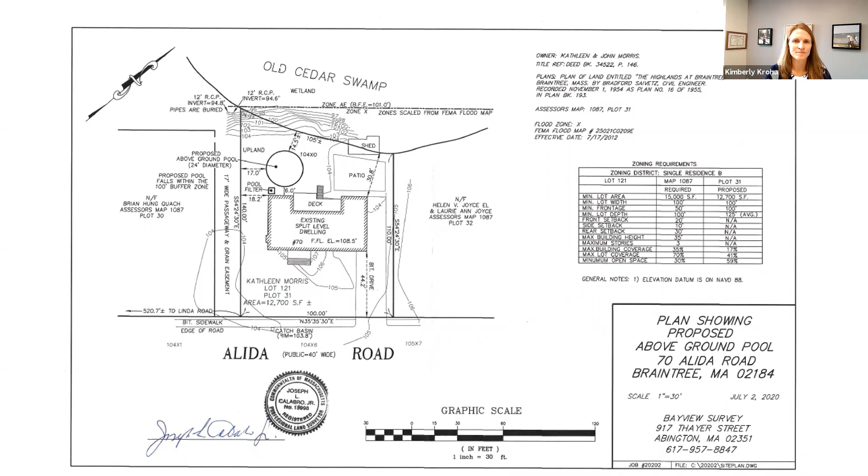I'm sorry, I missed who said that. Oh sorry, that was Kim Kroha. Oh, Kim, sorry, I can't see all the faces. I thought it was your voice, but it's harder than you think to navigate back and forth. No worries. So 9 months, you were suggesting? Right, okay.

That seems reasonable to me. It's reasonable to me. We don't need another plan, I think, if the zoning is a problem, and if you give them some time to plan for what the zoning issue is. Okay.

This is Peter Williams. I would say regarding the survey, we have a stamped plan and they could take some offsets from the corner of the house and locate the corner of the lot and then work from there on the fence. It probably would be close enough in this case. The plan does show—it's not to the lot corner, but there is the offset from the house to the shed. You can just take an offset, measure perpendicular from the house, then locate that point and work the property line from there.

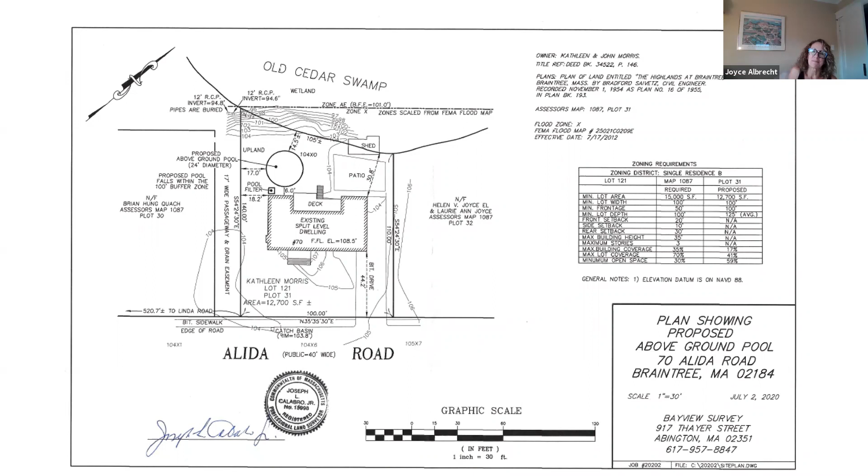Commissioner Hayward. Yes, I vote yes. Okay. Commissioner Kroha. Yay. Commissioner Albrecht. Yay. Commissioner Francis. Yes. And Commissioner Williams. Yay. Okay. That vote passes unanimously.

6-0-0. Okay. And why don't we now finish our discussion of, or make a motion with regard to the encroachment issue. So I guess now that I've said I would make the motions, I have to do this one as well. Let me just make sure I've got it all straight and we agree before I actually attempt to make this motion.

Based on the discussion, we're going to require that the shed be removed from the town of Braintree land. But we will allow the fence and the retaining wall to remain in place and the landscape bed, and require that a new section of fence be added across the property line from the edge of the shed to the property line.

We didn't talk specifics about mitigation. My thought was to require a handful of native shrubs and then seeding with like a wildlife seed mix, something along those lines. If anyone disagrees, speak up, or if I've missed anything, let me know.

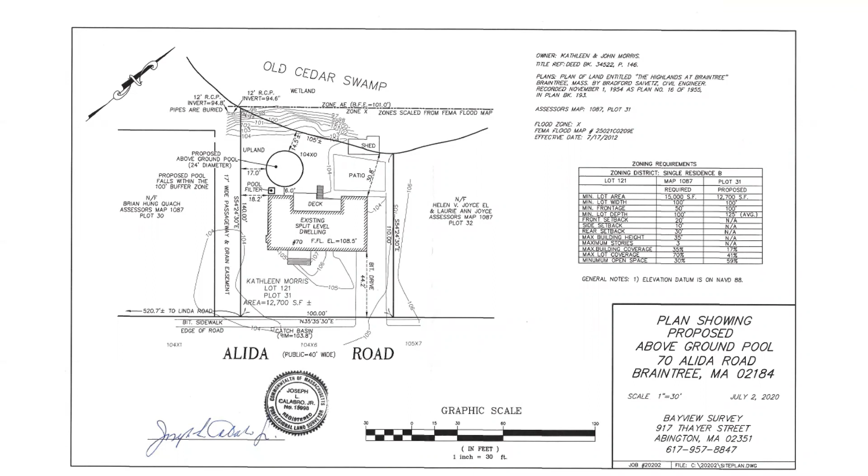Yeah, right. Only because - sorry - that shed is at least 20 feet. If you took a look in it, you would believe me, it's got things inside that need to be put somewhere. And not only that, to tear that down and remove it at a huge expense, I lose out on all that space, put up a fence, put up all the shrubs.

All I can say is it's very unfortunate when you're in this situation - you come into it not even realizing there's an issue. Unfortunately it happens sometimes, so you're not the only one, and sometimes this is how it comes up, where there's a permit otherwise - we don't always know about these things. But when we find them, we have an obligation to take some sort of action. And there's also a bit of precedent where I'm sure there's other encroachments in town, and we have to be consistent with how we respond to things. So yes, that was the decision, but stay in communication with Kelly - we do want to try to work with you to resolve the issue. And with that, I guess I will make a motion, unless there's anything further to add from anyone.

Okay, I'll make a motion to close the hearing for 70 Alida Road. Is there a second? Second. Thank you, Commissioner Francis. I'll now take a roll call vote. Commissioner Hayward, yay. Commissioner Kroha, yay. Commissioner Albrecht, yay. Commissioner Williams, yay. Okay, that is unanimous again, 6-0-0.

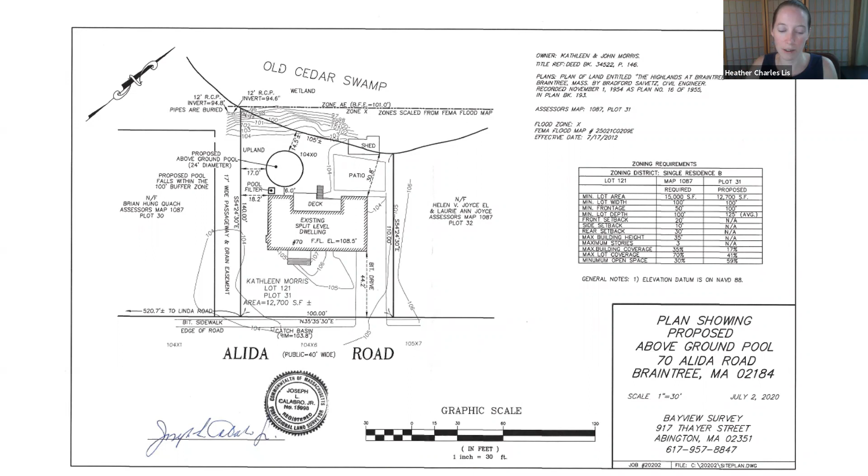Thank you to the Morrises and all for your cooperation. Okay. Thank you. Okay, good evening.

Now we have a notice of intent, DEP file number 8-681. The location is Gordon Road, Watson Park, and the applicant is the town of Braintree. We have two notices of intent for the same locus. The first one is for the bank and salt marsh work. And I will turn it over to the representative to present to us.

Thank you. For the record, my name is Elise Leduc. I'm a coastal scientist with Woods Hole Group, and I'll be representing the town of Braintree for this and the following application.

This, I guess, would be up to the commission. Kelly and I had talked about it beforehand, whether it would make sense to open both hearings and talk about them as a sort of single conversation, but it's up to the commission whether you think that is more or less confusing. Okay, commissioners, any strong opinions on that? I would recommend doing them together just for the big picture and the background are the same for both. Yeah, yep, I'm fine with that.

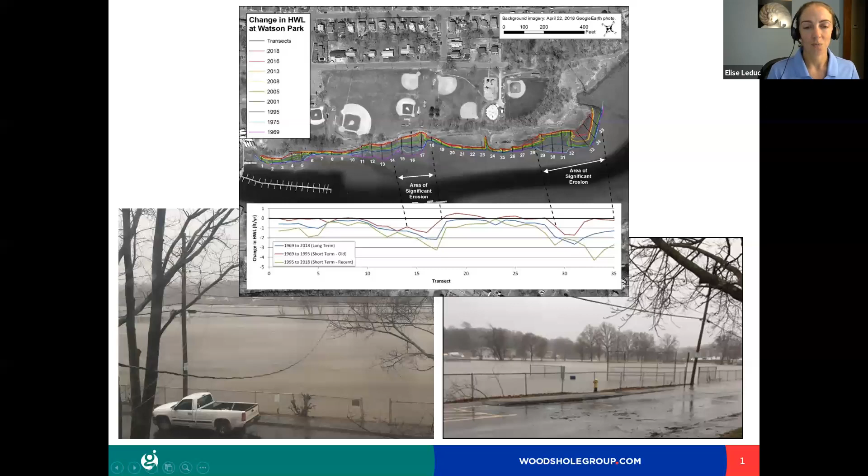In addition to erosion and flooding, looking forward, the question was also what is the future of this park, and what is sea level rise going to do to the water levels in this river? Currently, the present day mean high water is at 4.8 feet NAVD 88. That's expected under a high sea level rise scenario to rise to 5.8 feet by 2030 and 8.36 feet by 2070. The important part of this number is that most of the playing field surface within the park is at about 8 feet today. That means the prospect of the salt marsh migrating landward is not likely until sea levels reach this level.

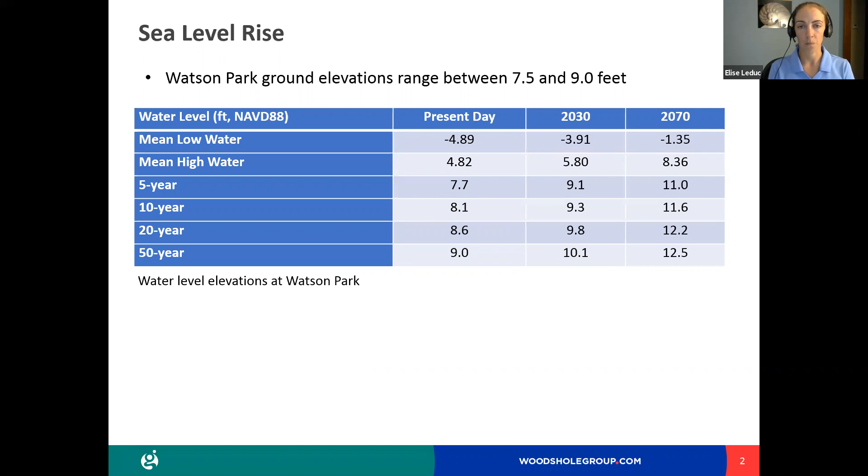So thinking on the order of approximately the 2070 timeframe, while it's in the long range plan to allow that to happen, what can we do to protect the park from flooding in the short term? That's part of where our proposal came from — stopping short-term flooding with the idea of helping long-term salt marsh migration. I'm hoping many of you have seen the site, it's a really unique area. I'm not sure how many of you have actually walked out into the intertidal area and seen it from the water rather than from up behind the fence. But I want to walk through what some of the resource areas actually look like.

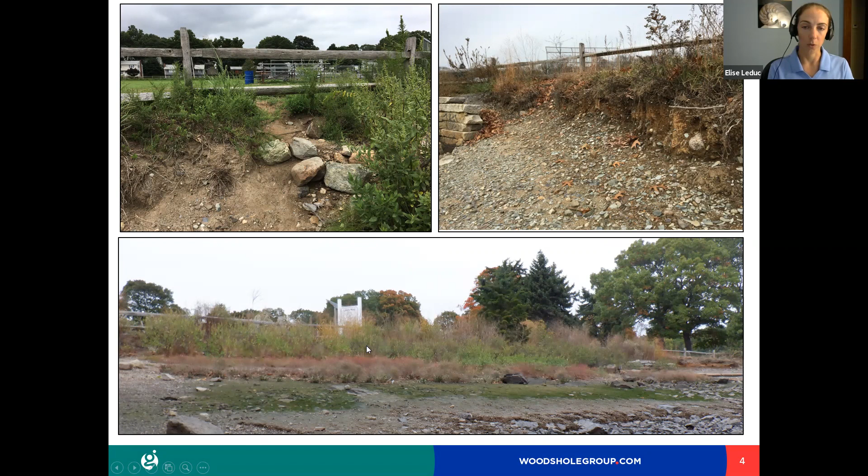The coastal bank was one of the main concerns from the town when they first approached Woods Hole Group. There are a couple of sections of significant bank erosion. The bank is not very tall, but where it is eroding, it's causing potential problems for undermining of existing structures and/or threatening the walking path and playing field area. So there are a few sections right around the head wall of the existing stormwater outfall that are significantly eroding. This photo on the upper left is actually right at the terminus of that stone seawall, where the bank is cut back behind the location of that wall. The center of the bank, however, is fairly well vegetated and fairly stable — some shrubs, there's even an eastern red cedar growing in the center of it. So there are some portions that are fine, but there are portions on either end that are eroding, and we are proposing to restore and stabilize.

This is just a view of the bank from up on the path, which you've probably seen. You can see how close in some cases the erosion is getting to where the walking path is, and how the bank is actually cut back behind the level of the seawall where it is right now.

There's also significant salt marsh remaining in this location, more so to the downstream eastern end. There's a very large platform of healthy salt marsh, Spartina alterniflora, along the river side, and a large platform of mostly Spartina patens across the center. But that portion is significantly scarped and eroded — there's about a 4 or 5 foot drop from the front of this salt marsh area down to the mud flats. As you move across the project site, there's only remnant scattered pieces of salt marsh. This center area is mostly sea lavender that's remaining, and there are some areas of high tide bush with some Distichlis and Juncus mixed in along the edges of the wall. But basically as this area erodes, salt marsh is getting pinched — it's left with very few areas where the elevation is appropriate for salt marsh vegetation growth and survival. The rest has been eroded too low to allow for salt marsh grasses to persist.

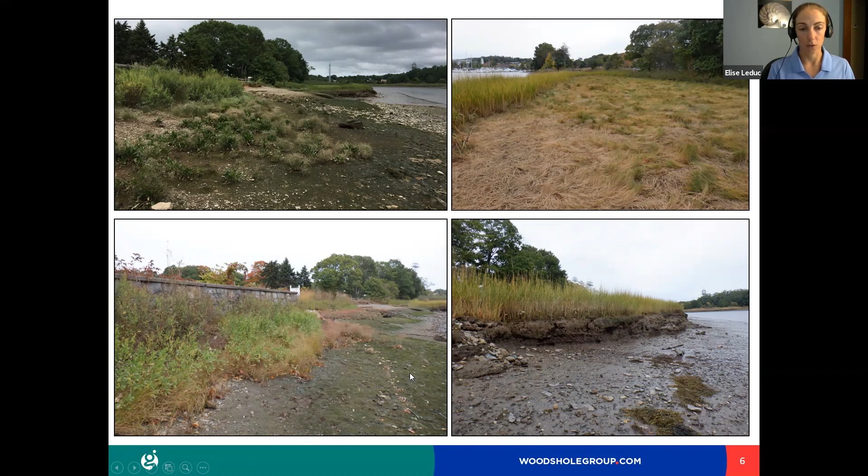There are also 4 lobes that we mapped as rocky intertidal. These rocks are coming out of the beach essentially as the finer grain materials are eroded away over time.

Some areas of it are largely bare rock, while other areas provide habitat for barnacles, attached macroalgae, and other organisms. There's even a section up by the stormwater outfall where, in addition to the outfall walls and stone blocks, there's natural stone material actually meeting the definition of boulders in an intertidal area, making it rocky intertidal shore.

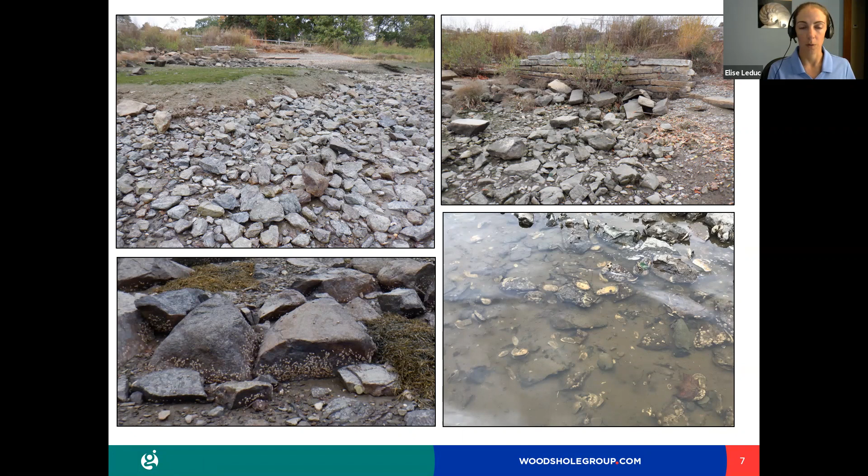And one of the lower elevation areas actually had live attached oysters. So there is significant habitat out there, and our project footprint avoids these areas almost entirely. In some cases, we're actually trying to mimic some of these habitats in our project.

I'd be remiss if I didn't point out that even though we focused on the coastal bank and salt marsh restoration, we're faced with a site that has this in the center of it, so we can't put salt marsh back across the entire project area. There are two outfall pipes, though it's hard to see the second one. They're both crushed, and the wall itself is in a state of disrepair. You can see some of the large stones have been pushed out and off of the wall. These two pipes drain the entire neighborhood behind Gordon Road during storms, so all the stormwater comes out these two pipes.

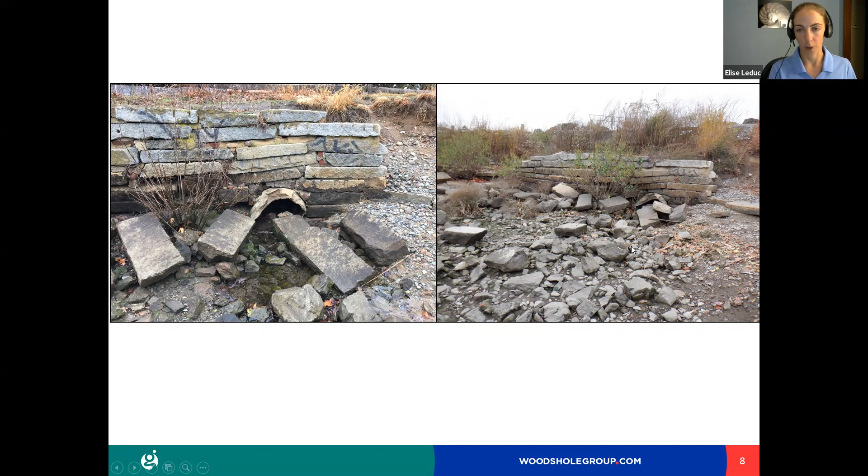Just one more view of the site. In addition to the resource areas I talked about, the entire park is within an AE flood zone, so it's land subject to coastal storm flowage, and 200 feet from the high water line also falls within the riverfront area. And I did mention the land containing shellfish.

We do have oysters as well as some low density areas of soft shell clams. So that's the site as it exists. What we're proposing is actually four different components, broken up into two different applications. The first component is a restoration of the salt marsh areas.

We're proposing to place 260 cubic yards of engineered wetland soil—this is a cross section down the site—to bring the elevation up to a point that will support salt marsh vegetation. Right now it's very low due to erosion, but to stabilize the amount of fill needed, we're proposing a rock sill to stabilize the toe. This will require dredging 86 cubic yards of the coastal beach to create a stable toe for that rock sill.

We are proposing two different sections, one on the east and one on the west of the existing stormwater outfall. To minimize the size of this rock sill, both in length and height, we're proposing two different target heights for this portion of the project. The western portion will be built to 4 feet elevation, but on the eastern end, in front of the existing salt marsh platform, because the height needed to reach 4 feet is so significant, we're proposing only 2.5 feet, which minimizes the face of that rock sill on the river side.

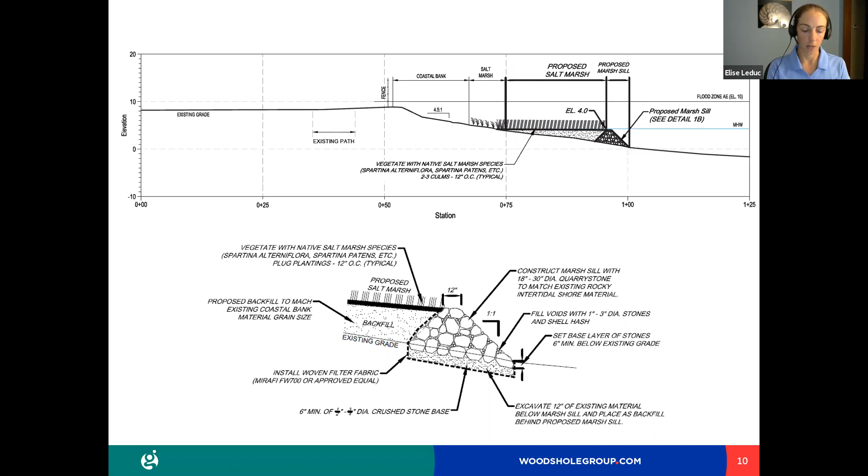The headwall itself will remain. We're not proposing to fix anything about the upstream end of the stormwater system, but the part that's actually exposed within the project site we plan to repair in place, with the difference that we're trying to minimize the front face of the wall by stepping it down instead of having a solid rectangle. This will minimize wave reflectance during storms moving forward.

We're also hoping to replace the very ends of the pipes, where they're currently crushed, and retrofit them with a check valve or tide gate. Currently, if the tide reaches a really high level during a storm, water could push back through the stormwater system and percolate up through the storm grates in Gordon Road. By adding a tide gate or check valve, you allow only one-way flow—water can come out of the pipe, but tidal water can't go back up into the system.

In the rocky intertidal zone immediately downstream of the current outfall pipes, we're proposing to add additional stones of a similar size and nature to what's there now, to help slow the flow that comes out of that pipe and reduce scour in the future. It's that ongoing scour from both the pipe and boat wakes and storms that's actually removing the fine-grained material from this site, so we're trying to slow down that process as much as we can.

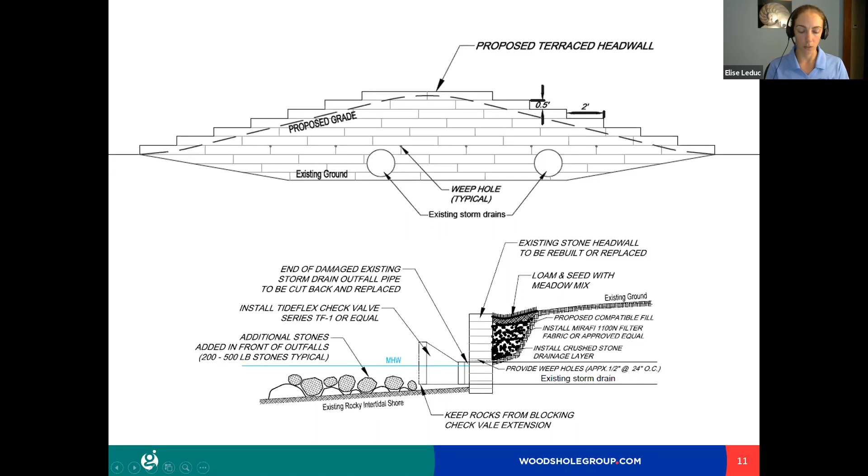We're also proposing to stabilize 2 pieces of the coastal bank. Just to orient you, the end of the seawall is down in this location, the existing stormwater head wall is here in the center, and the fence and walking path run right here. There are 2 sections: one 30-foot section nearest to the existing seawall, and an approximately 60-foot section of coastal bank experiencing erosion right now, around the stormwater head wall.

We're proposing to cut that back. If this is the existing ground, we're proposing to cut it back to a stable 3-to-1 slope, install a biodegradable erosion control blanket over it, and plant the surface with a native New England coastal salt-tolerant grass mix.

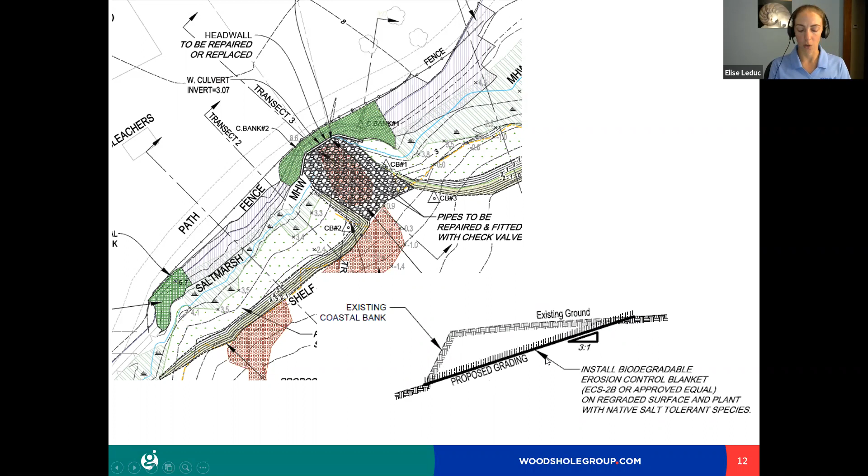The second application has these second two components, but let's walk through them now. As I mentioned in talking with the town about the problems on this site, in addition to the erosion and the loss of salt marsh and the potential longevity of the salt marsh here over the long term, we realized there's also a flooding problem. While the baseball field may not be able to persist past 2070 due to new sea levels, in the meantime it's going to flood at an even higher frequency than it already does today.

To eliminate what would be continued maintenance costs, getting debris off the field and reseeding where grass dies from saltwater, we have proposed putting in an earthen berm along the existing location of the footpath. The footpath would actually run up along the top of the berm, which would be built to an elevation of 10 feet, about 2 feet higher than the ground level there now, with 3-to-1 side slopes on both sides.

The field side of the berm would be planted with a regular lawn grass mix that could be mowed, similar to the field side, and people could walk up the berm onto the path if they wanted to. The river side would be planted with a native mix of grasses and plugs of other native species. The path itself would remain pervious, using either crushed shell or pea stone, so there would be no impervious surfaces added as part of this project.

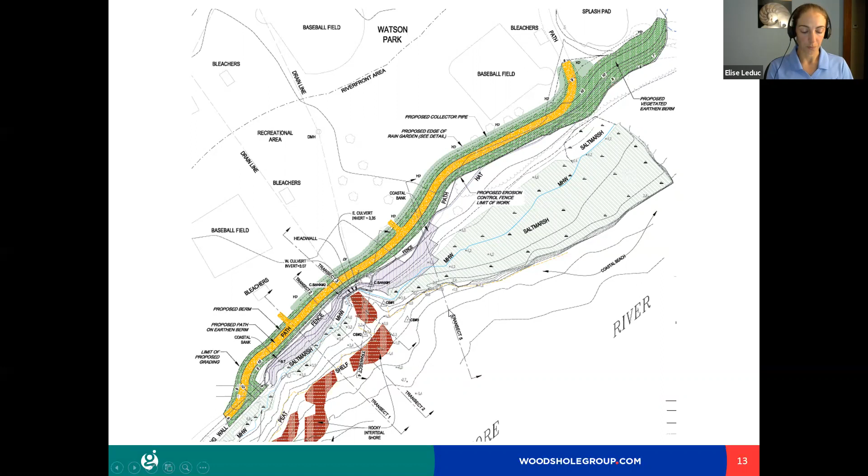These rain gardens would be right off the edge of the slope on the field side of the berm. They would be planted with a mix of native plants, and there would be an overflow pipe within them. Minor, regular storms would percolate directly through the soil, while any larger storm, rather than overflowing the rain basin, would go into this pipe, run along a collector drain, and ultimately connect into the existing stormwater outfall pipe.

I think that is what we were proposing in a nutshell. There are some questions that Kelly raised in her report, which you folks probably received a copy of as well. One thing I'd like to point out, and we can talk about this in more detail, is that we were unaware when we designed the project that there is an existing rain garden on the river side of the splash pad.

We were thinking of ways we could redesign the project based on input from the commission, whether it would make more sense to turn it early and connect into the higher elevations on the side of the splash pad, avoiding the rain garden entirely, or to make it slightly more narrow, running in front of the rain garden and connecting into the higher elevations on the eastern side of the splash pad.

There are pluses and minuses to both methods. Running it to the west of the splash pad actually leaves a small flood pathway on this side of the splash pad, potentially undermining what we're proposing to do with the berm in the first place.

However, running this in front of the rain garden would require cutting back some of the existing woody vegetation. It would also need to be slightly more narrow in order to fit with the least amount of impact to that vegetation. And we'd have to figure out how to deal with the overflow pipe from the existing rain garden.

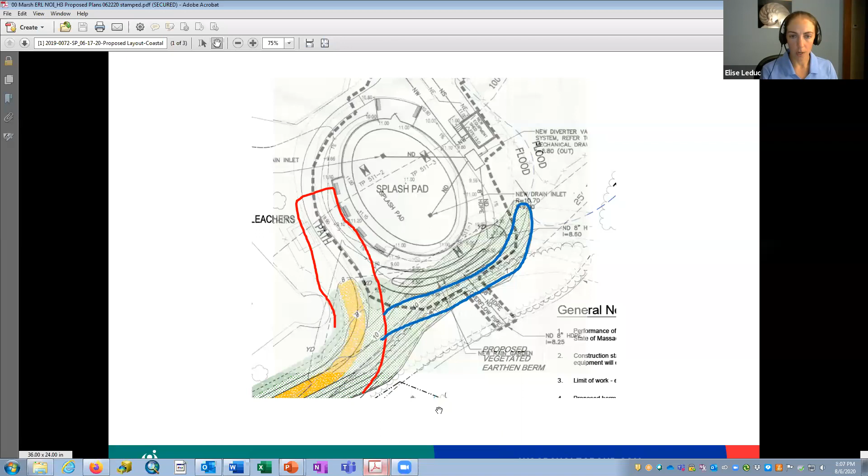Yeah, so I can show you and also give you the numbers. Hopefully you can still see my screen, so I reshared it. Of that 6,498 square feet of coastal beach that's being converted...

4,398 of it will be restored as salt marsh, and that is the total of the area in both restoration lobes.

The additional 1,366 square feet is actually from the front half of the sill. It's a little tricky to see, so I'm going to zoom in more to describe this. At the crest of the sill, these lines going forwards and backwards are the sill slopes itself.

The salt marsh restoration will actually come to the middle of the sill, so this portion back here will be buried with fill and planted with grass. But this front portion is the front facing slope, and it does take up space. So that additional 1,366 square feet is from the sill footprint.

Okay, thank you, that's really helpful. Yep, it's a lot of detail on this plan, so good to be able to zoom in and share the screen.

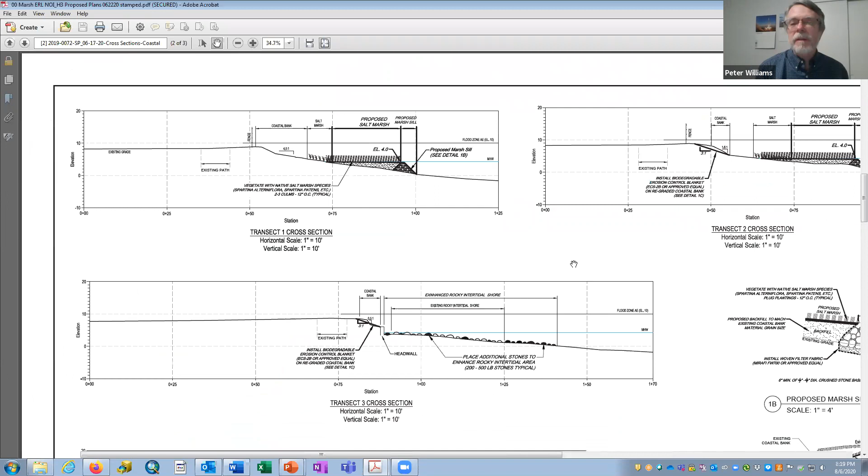Maybe round that off a little bit, let that opening open up a bit and reduce flows during storms, if you can consider that. And then the other thing was on the sill itself, you're filling the voids of the sill, but wouldn't that make the front slope more of a solid surface, which would actually cause more wave reflection? And you may not want to do that. Is that essential to the stability of the sill if you leave it as porous?

Are you talking about this figure here? Yeah, where you call for fill, you're filling all the stones. So basically you're going to have a flat face here. Yeah, it is essential that this sill not be porous. Otherwise, what we are putting in to create the fill for the salt marsh would trickle out over time, and you would have a sunken area in the back end.

Our goal for this, although it looks very flat here, is to use stones very similar to what's at the site. So it will be somewhat flattened, but it won't be smooth, it'll be more natural rock. Okay, so you can make the front face irregular, but have the core stones to keep the fill in. Correct. Can you make that adjustment?

Do you understand what I'm getting at? Just make a note that the front face will be an irregular surface, not smooth and flat. Yes. That's it, thank you very much. No problem.

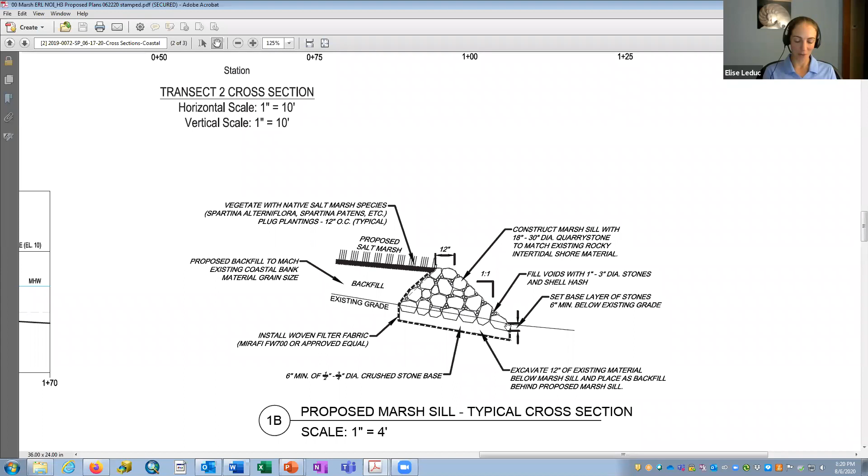Sorry about that, not the only one with a little interruption on the side. Apologies. Does yours have four legs too? Only no, two, but of small stature.

Okay, thank you, Peter, for all those great questions. And I have a few, but did anyone else want to comment first? Feel free.

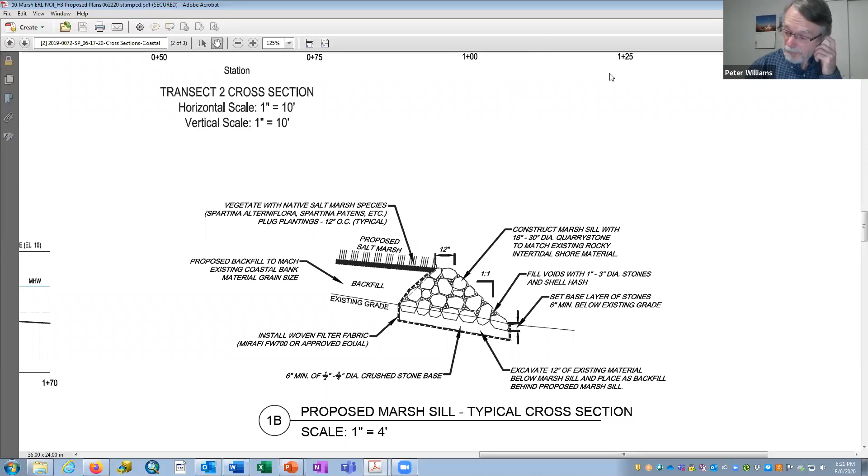I guess I have a question, I'm Chris Hayward from the Conservation Commission. Am I muted? I can hear you fine. Excellent, all right great. So I'm down at that field an awful lot during the summer months, and we're always telling the little ball players to please stay on this side of the retaining wall, please don't go over under the bank. Will there be any type of signage to let people know what this project's going to be all about, and kind of stay out of this area? They're always chasing foul balls, so things are going to just get crushed after they get planted. So just for a little bit of educational material.

Kelly, do you want to respond to that? Well, there is a plan to have some educational components, which we haven't nailed down yet. There's also going to be temporary wildlife exclusion fencing around the salt marsh restoration until it gets established. But other than that, we weren't going to fence it off, other than perhaps putting the split rail fence back up just to discourage people from walking down there.

But you think that split rail isn't enough? Like kids would actually go walk on the salt marsh? We had half of our team the other night, we won a game and they took all their shoes off and went dancing in the mud.

So, guys, come on, get out of there. This is ridiculous, will you please leave? Yeah, I mean, it's tough to control, of course.

I was just curious. Some of the coaches aren't into this type of situation like I am, and I'm always preaching, guys, stay out of there. But some folks might not exactly know why this is being done, so I think education is the answer.

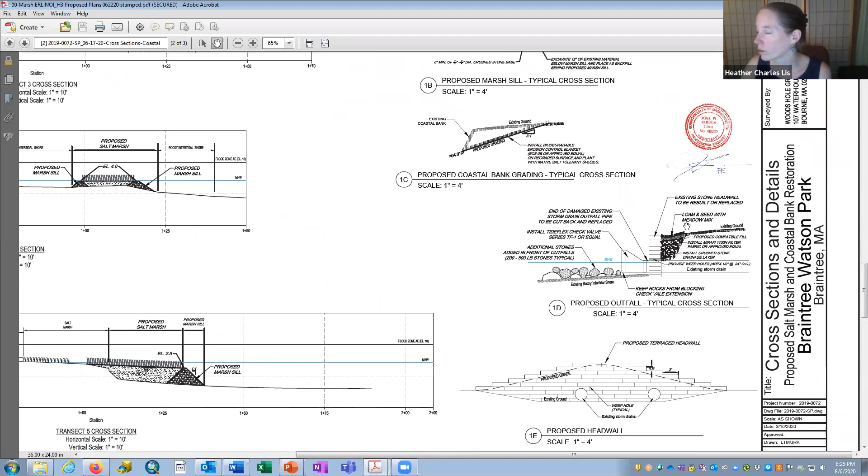Okay, I had a few questions while we're on the nitty gritty. On the detailed plan behind the outfall, there's a meadow sort of shown. Are you on this main plan or on one of the details? I am on the first detail sheet, this area here, the outfall. So it's 1D, the proposed outfall typical cross section.

Yes, so there's loam and seed with the meadow mix, and I didn't see, although I may have missed it, a specification given for the meadow mix. It probably is not in there. This is a really small area, so I think we were just trying to indicate that we were trying to fill - there's a gap behind the head wall right now. You can stand in a knee-deep hole behind the existing head wall, and we just wanted to bring that back up to grade and plant it with something native that wasn't lawn grass.

But we can add - I would actually probably want to just change this to the same mix that we're planting the bank with, which is what did we call it? A native salt tolerant grass mix. That sounds good to me.

I actually wondered, in part that's why it jumped out at me, because I was wondering what the difference is between this meadow mix and this other area. I don't think there is - I think there's sometimes a miscommunication between the ecologists and the engineers. Well, you have such beautiful detailed planting plans for the other areas, so I was just being thorough, trying to catch every little bit of plants.

Yeah, no, thank you for going through these with such detailed eyes, because ultimately you give this to a contractor and they're not going to know what it means either, so better to get it right now. Sounds good. So I also had a question about where the marsh is being restored.

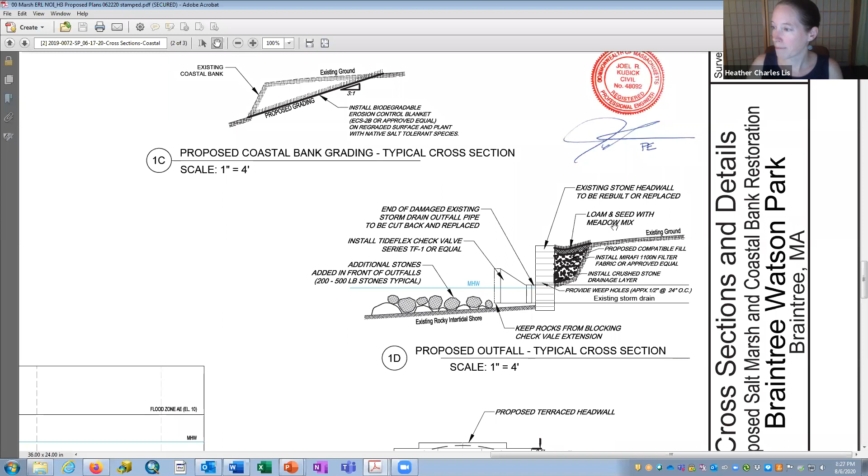As Peter was also pointing out, where there's a proposed restoration, a lot of it follows along where the base of peat currently is. I realize the limit of work is the retaining wall, but I see there's a large base of peat where there was historic marsh, along the retaining wall to the west of the proposed work area, southwest. Was that area excluded simply because of cost and the limit of the project, or is there another reason why it wasn't suitable for restoration?

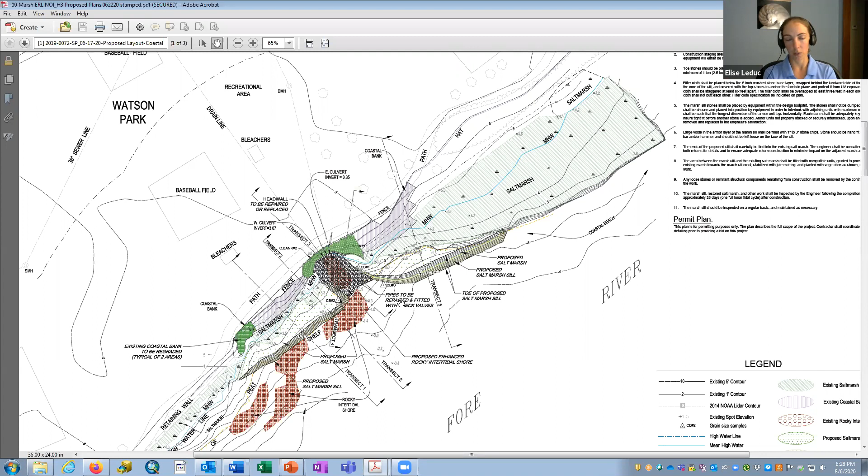Correct, it's just a matter of scale. The more of this coastline you try to restore, the engineering fees will be more, the construction fees will be more, and the monitoring and maintenance fees will be more for the town. While it would be great to restore salt marsh in front of the entire area, the real impetus for this project was this one open area beside the wall before you get into that shrubby vegetated area farther down the path where the erosion is evident, to slow that erosion, protect that coastal bank, and restore some habitat at the same time.

Okay, thank you, that's helpful. I always like to look at what's the most we could possibly do with a restoration—with more money you can do the whole thing. A little pie in the sky, but I wanted to ask and know what the limitation was. Yeah, we just had to draw the line somewhere, so we went about an equal distance on both sides of the main core problem area. Okay, great, that makes sense.

The last thing I had is that there was a comment, and I didn't unfortunately write this in my notes, whether it was from the ENF certificate—I think that's where it was from—or whether it was from the Marine Fisheries comment letter. But in any case, the suggestion came up to put some mats over the existing marsh during construction, and also to not store any equipment, machinery, or materials on the marsh, which seems very straightforward. Do you have any thoughts on that? I don't actually, I missed that one, so that's not in my notes.

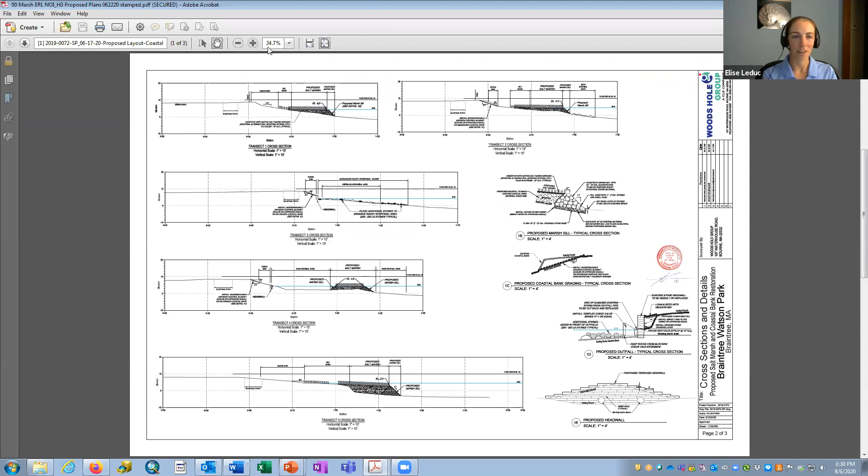Do you have the actual language? What kind of mats were they proposing? I don't think it's specified, but I might be able to search the document. Fingers crossed the word mats only comes up once. Marine Fisheries does talk about using best management practices such as mats and blankets to minimize turbidity impacts, so that's a little different.

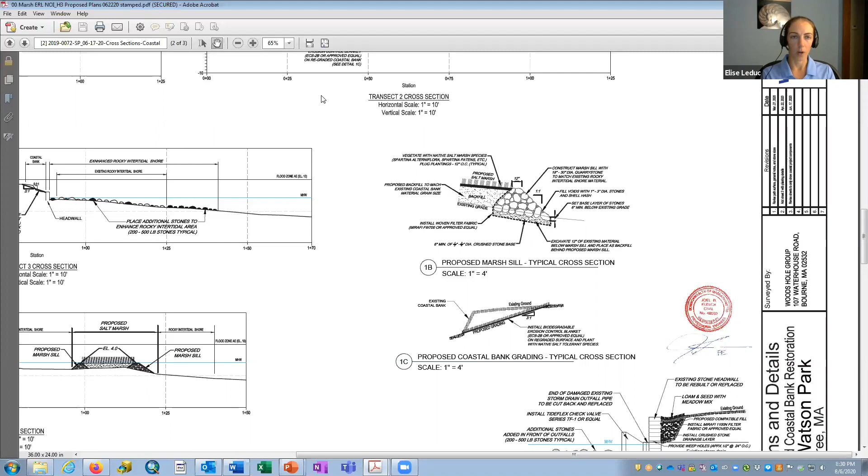Okay, here it is—page 130 of the PDF, and I was right the first time, it is in the ENF certificate. It says DMF recommends that existing salt marsh be covered by mats when accessed during construction. So it's probably just a general comment they're making, more relevant if the only place this might need to happen is on the eastern end of the project where the existing platform is.

So if we have to come out here to construct this, we'll put mats down over this part of the marsh. The goal is to construct as much of it as possible with a long reach excavator from the actual field, so you're not running equipment down the bank and onto the intertidal area to the extent possible. But this area is so far from where you can park something that we may have to come out just a little onto this platform. Okay, that makes sense—so as with many other things, I'd suggest adding that into the narrative somewhere.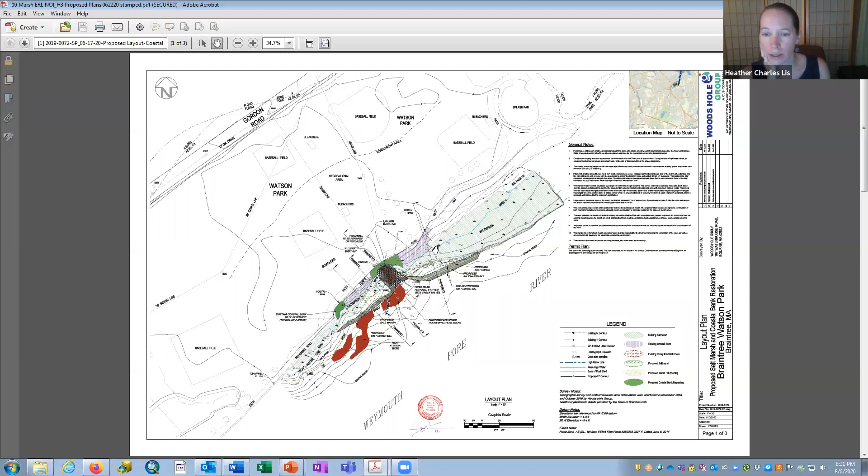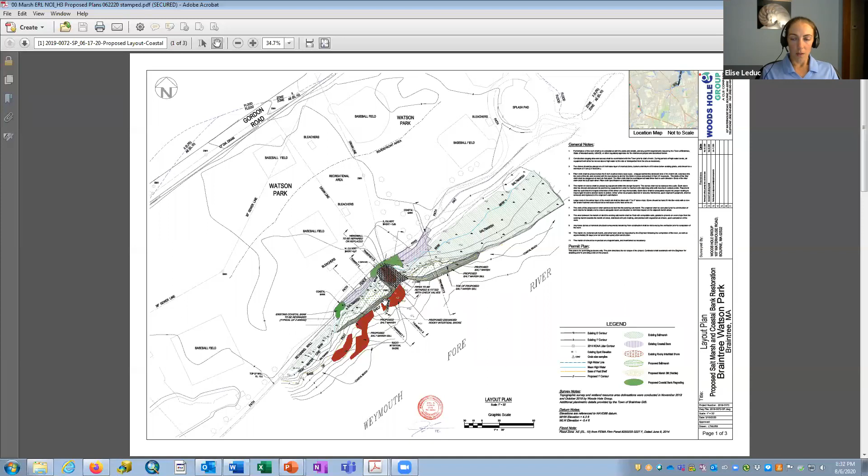The last question I had—sorry if this was in the narrative and I missed it, it's a long narrative, but I appreciated it, very interesting as well—the existing salt marsh, as you get closer to this outfall, is very sparse in places. Are there supplemental plantings going in for the existing marsh, I mean? I don't know that we really thought about that.

I know we were talking about planting the area where we're putting fill in, but it certainly makes sense to carry those plantings back to the coastal bank where there are bare spaces in between, say the sea lavender individual plants and things like that.

Again, it's more cost to the town, but I think you'd end up with a better product because you're buying more plants at that point. But to the extent that there are large gaps, that would certainly be useful to do.

I'd also say if this is constructed in, say, March or April, those plants aren't even visible. The above ground portion dies back and gets sheared off with the ice and water. So when you visit this site in winter, it looks like there is no salt marsh in this area. If you go back in summer, you can see the vegetation that's popped back up. But during construction, it's likely that will all just look like an area to get planted.

So I would say, yes, there would be plantings in that area, but we can make that clearer in the narrative. I think that would be great. I see it as something that is for the benefit. The cost is not that high compared to the rest of the project. Exactly, a couple hundred more plants isn't going to make or break the budget.

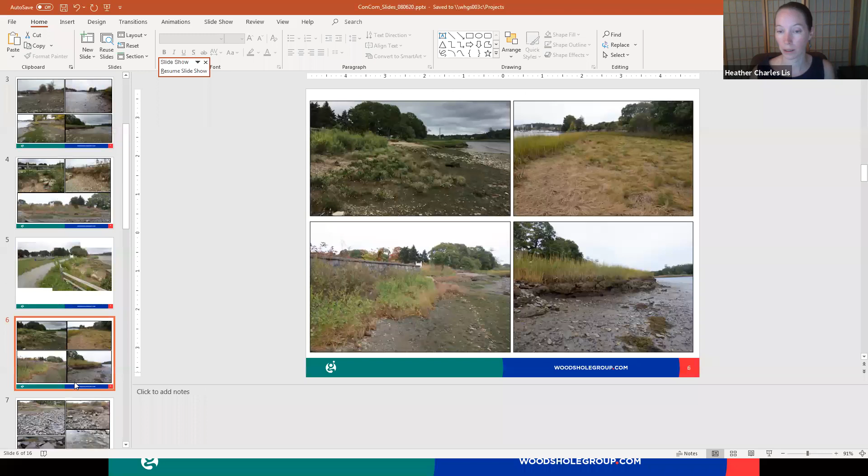Okay, then we'll move on to item 6. This was already discussed a little bit about the berm appearing to extend into the rain gardens. I think this would be an opportune time for the commission to talk about that area, basically. Assuming that the commission agrees to approve the work, we can talk about that as well. If anyone has a strong opinion on these options here, you could say it now.

So I do have one comment on this. I'll just say, with the blue option, I'm not sure how we could permit that, given that it would require the removal of naturally vegetated areas in the inner riparian. That's my main concern with it. I understand that it introduces an area where there would be some flooding. Maybe it's just something we have to think about and return to at the end of the discussion, but that was my one thought on it.

Can we see, that's on the inside? So behind the splash pad is the rain garden, and then behind the rain garden, pretty quickly you get into a naturally vegetated area, the whole thing is in the riparian. To point out some things that are very hard to see on this figure, this shape right here is the existing rain garden. There's an overflow pipe here, but this scalloped area is the existing vegetation. So there's maybe 5 feet between the existing rain garden and where the vegetation, shrubs and trees actually start right now. So there's not a lot of space to work something in if you're trying to stay on the river side of the rain garden without affecting the existing vegetation.

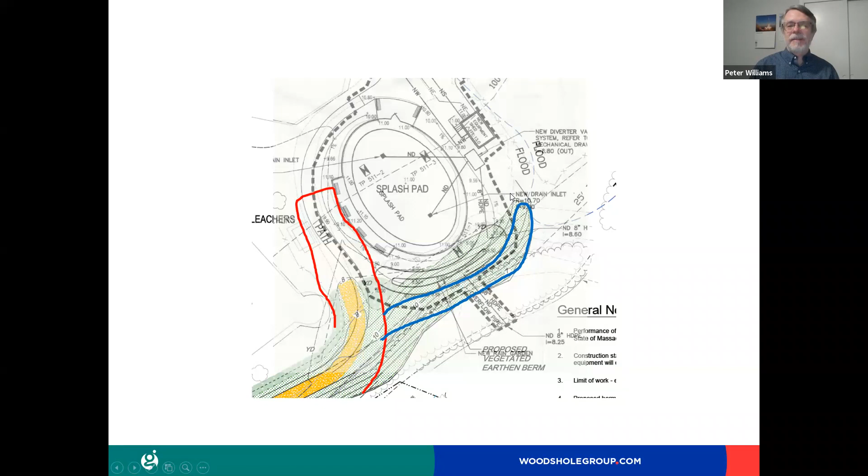Can you use your pointer? I don't know that I can with all of these plans on top of each other, but it is somewhere in this region. All right, I think we ought to consider just rerouting the berm and then think of some alternative to maintain that 10-foot contour.

Thanks, Peter, that's a good suggestion. So number 7, some of the contour lines are missing labels or labels are difficult to read, and these should be added or made clear where obscured. I think that one's pretty straightforward.

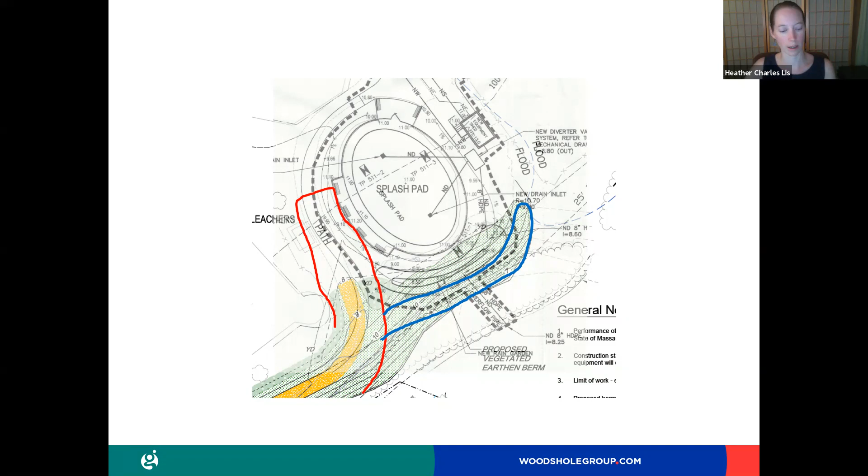Number 8, the rain garden appears to impact existing trees near the baseball field. It may be preferable to eliminate this section of the rain garden in favor of leaving mature trees. There's mature trees in the inner riparian area. We really shouldn't be taking those out.

Also, while we're thinking about trees, there's a memorial bench and a memorial tree in the work area, and I'm a little concerned that the berm might interfere with those, and that would be something we'd want to make sure was acceptable to move, if it came to that. I don't know if it would be possible for the tree or not. So that's just something to consider.

I can speak to that a little bit. Any of the trees in the footprint of the rain garden, which are more visible on the plan as it is right now, we could work around. We could reduce it, in the same way there are gaps in the rain garden elsewhere, and put a gap there to avoid impacting these trees.

There are, however, a couple trees here and here, which are very difficult to see on this plan, but there's a shape right here and here and one right here. This is happening because right now the existing path runs so close to the edge of the bank that once we pull the bank back and have room for the 3-to-1 slope on the front side of the berm, we have to move the path back just a few feet, and there are currently trees right at the edge of the existing path.

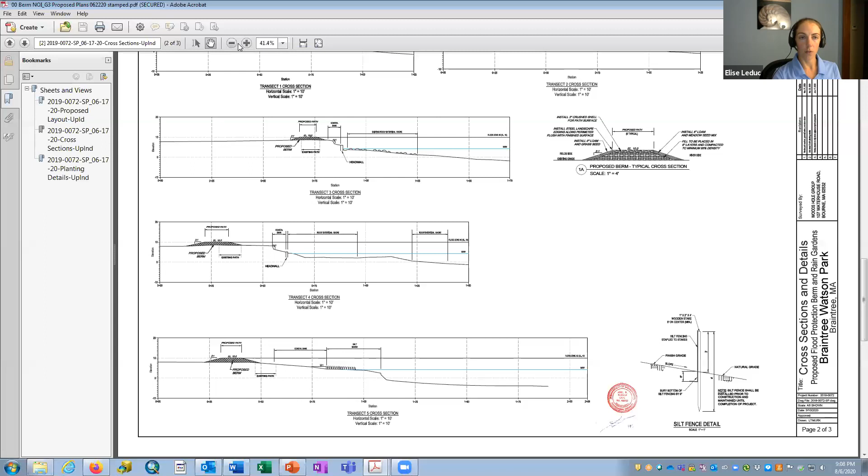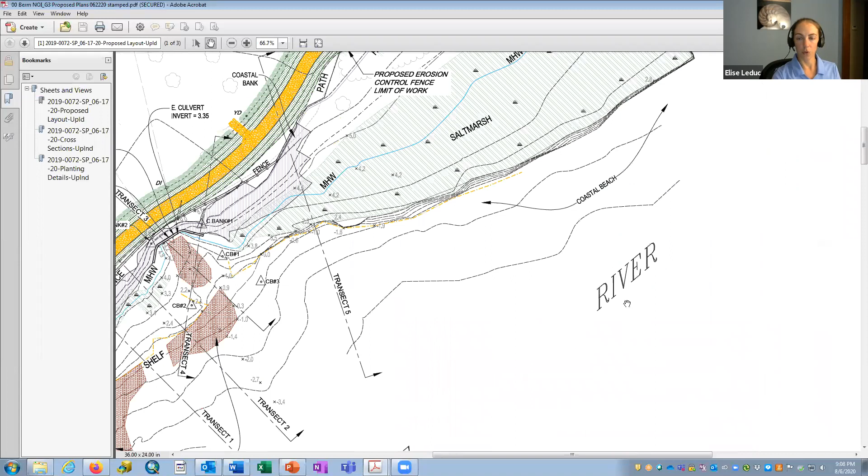I did ask our engineers their thoughts on this and whether they felt there was any potential for the structure of the berm to be impacted by water in the rain garden.

And the answer is not really. The rain garden is not intended to hold water for a long period of time. The water will either drain out through the pipe or percolate through the soil. If there was a concern, this Filtrexx compost erosion blanket that we're proposing could be carried up the field side of the berm to create more continuity between the rain garden and the berm. We don't think that's necessary, but if it would add a level of comfort, we could add that detail in.

Okay. Seems reasonable to me to add it, if you have the detail.

Okay, so that concludes Kelly's memo here. Is there anything specific you wanted to add at this time, Kelly? I would ask, from where I stand, the salt marsh and bank stabilization part of the project has less for the commission to consider. It's kind of straightforward, and I'm hoping if we get the plan revisions it would be all right for me to draft conditions for the next meeting so that part can keep moving, because there's other permitting involved. The berm, I don't think it's critical that we get to that point by the next meeting because it's upland.

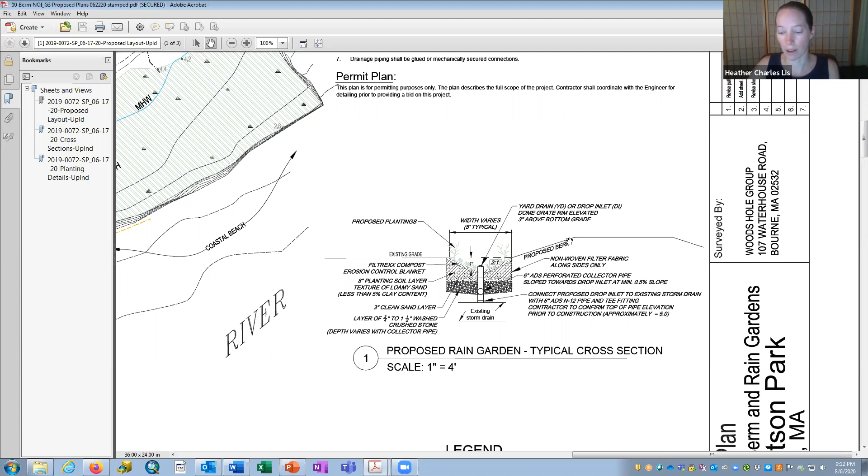So let's talk further if people have other questions about the berm project. I think there's more to consider, in my mind, in terms of whether we actually want this project to move forward. There's pros and cons in my mind. I think it's a little bit difficult, frankly. It's not a definite in my mind, but I can appreciate the benefits and all of the incredible work that's gone into getting to this point. So, questions or comments from the commission?

What is the cost of the berm project? Construction - I don't have that off the top of my head. But we did do an estimated construction cost for the town as part of this current contract, specifically so that Kelly and the town can start looking at fundraising and getting that in line, because even if they were to continue to get CZM grants in the future, there is a match associated with that the town would need to put forward.

And the berm portion of that came to approximately 120,000, with the rain garden being sort of at 70-ish thousand, out of a total project cost of 670. And those are just estimates.